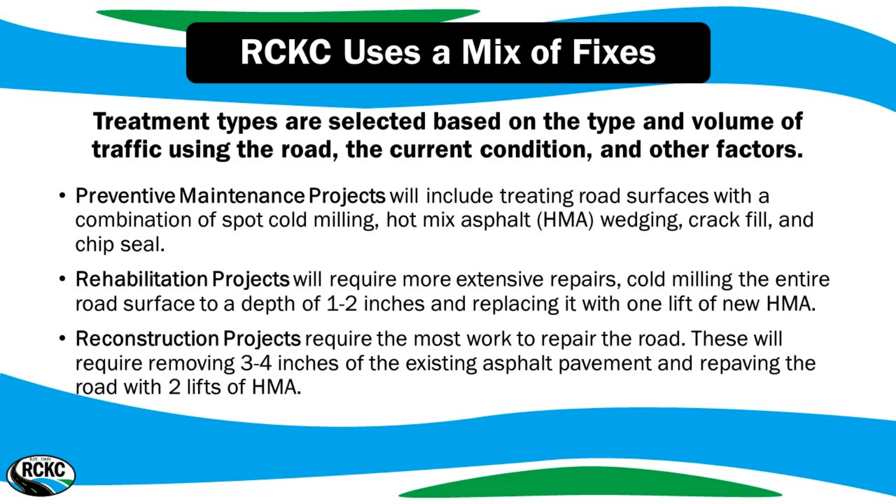So when the Road Commission does a project, we use a mix of fixes. We have many tools in our toolbox, and the way I look at this is like when you have a car, there's different levels of maintenance you do to it, right? So the three levels we have here are preventive maintenance, rehabilitation, and reconstruction. That preventive maintenance when it comes to car work is like doing an oil change in your car. It kind of keeps things running, keeps things going along. For us, that type of work is a chip seal, where it protects everything that's under there and protects our investment. Next, you get to the rehabilitation projects, where more extensive repairs are needed.

So kind of in the car analogy again here, say your transmission goes out and you want to evaluate, is the car worth getting the transmission fixed? For us, it means coming in and taking off a layer of asphalt and putting it back on to keep things going along for a few more years. And then finally, we reach a reconstruction project, kind of like we have out here for Lake Street. That's like you blew the engine in your car, or it's time to scrap it and move on to something new. So we're going to start over here with Lake Street and the work we have going on out here.

So you may be asking yourself, how was this project selected? The Road Commission did identify in our primary road capital improvement plan, which we do every year, this road as a project. Why? It was last paved in 1992. So 30 years is a pretty good run for a road. Probably reaching the end of its life here based on what we're seeing. The last chip seal we did was 10 years ago in 2013. So we have been doing the preventive maintenance in that 30 years.

Ultimately, there is a surface condition rating tool that's used uniformly across the state to evaluate the condition of roads. That's called PASER. If you want some more information on that, we can always talk about that later. But it's on a scale of 10, and essentially Lake Street was at a 4 out of 10 on that scale, with 10 being a brand new road. So we were reaching a point in the life of the road where it was coming to a point where we needed to do some major work.

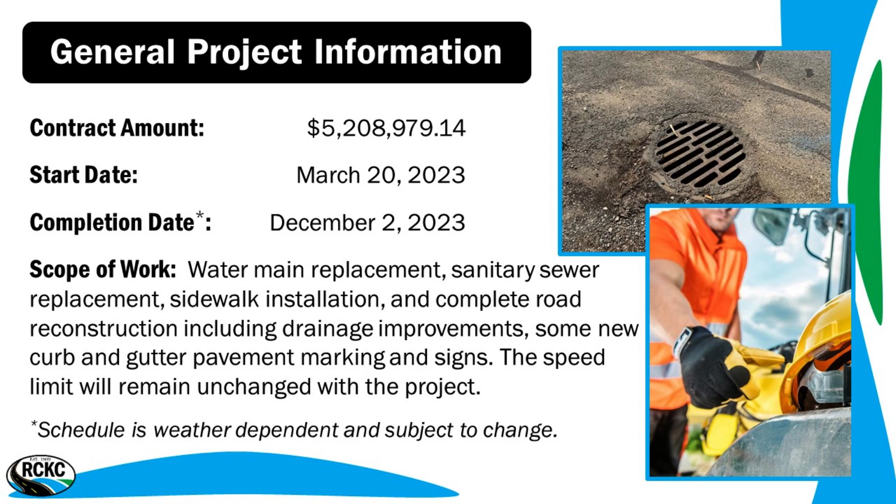The work includes water main replacement, sanitary sewer replacement, sidewalk installation, complete road reconstruction - curbs, gutter, pavement marking, signs, all of that stuff. We're not planning to change the speed limit on the road with this project.

I do want to mention that construction happens outdoors, so of course the schedule is weather dependent - things could shift around. Maybe if everything stays dry this summer, the contractor could get ahead on stuff, but we'll have to see. It's a long schedule, too early to say yet where we're going to finish.

So, impacts to traffic - this is usually what everybody's most interested in. There will be closures and detours in place for this project. The work is going to be done in 5 segments. We started the first segment already, so you've seen the work if you've been out there, going on the west side of the business loop. With these 5 segments, there are only 3 detour routes we need, so we're not going to be sending you on a different route every time we close a section of the road. We'll go over that in more detail here in a minute.

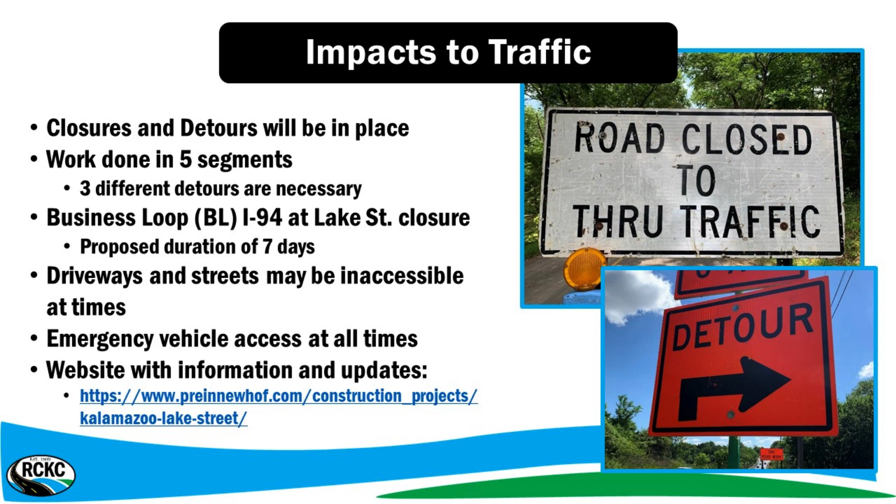There will be a closure of the business loop at Lake Street for 7 days during this project. We'll have more details on when that's planned, but it will be a full closure of the business loop for those 7 days.

With the work that's going on, your driveways and side streets may be inaccessible at times - contractors have to do work, and you may have to go around the block to get access one way or another. If we do work at driveways, we generally tend to put gravel ramps in if there are elevation changes so you can get in and out, trying to maintain access to your property.

Emergency vehicles will have access within the closures at all times, so there's no issues or concerns with emergency services being able to get in if you need their services.

I want to also mention Prein&Newhof again is the inspector for us. They have a website set up, preinnewhof.com, with a link for projects, and at the bottom of that page is one for Road Commission Lake Street. If you go to that page, they're updating daily what's going on, and the anticipated work for the next week.

Then the contractor is scheduled to switch to Phase B, moving to the other side of the business loop on Lake Street. This phase will close Lake Street from the business loop to Lamont Avenue, scheduled from May 30th to July 22nd. The detour for this route is the business loop to Olmstead. This is detour route number 2.

There's one more route we need to highlight to get you around the project. Depending on where they're working and what they're doing, access might be hindered a little bit temporarily while they're working in front of your properties or businesses, but we should be able to accommodate you getting in and out.

That third detour route is the most impactful. It happens when we come back to Phase A, Stage 2, which is the closure of the business loop at Lake Street. This is planned to be a 7-day closure, anticipated from July 24th through July 31st. The detour route is to take Olmstead to the business loop, back to River Street, to the King Highway, then to Branch, Vine, and Mills Streets to loop back around onto Lake Street.

After that, the contractor is going to move back onto Lake Street, further on down. Phase C is a Lake Street closure from Lamont to Roy, anticipated to occur from August 2nd to October 6th. This is a similar detour to Phase B, simply taking the business route down to Olmstead to get around the closure.

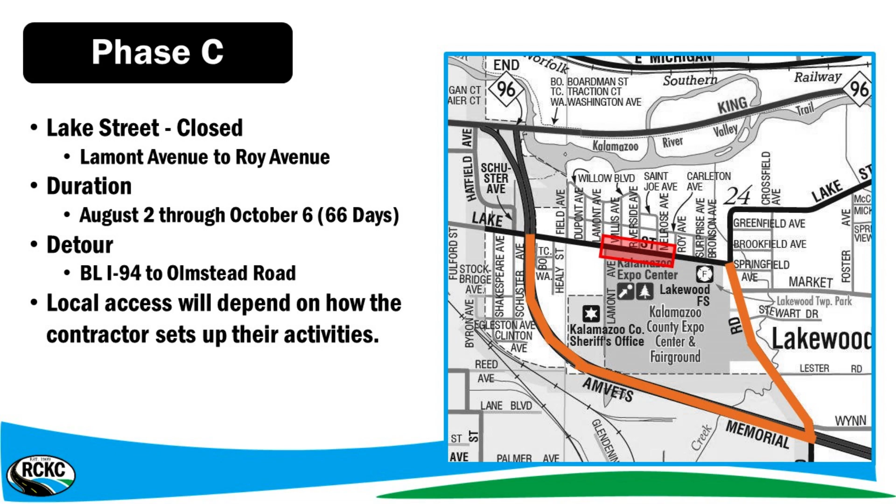Finally we have Phase D, which is closing Lake Street from Roy Avenue to Olmstead, anticipated to occur between October 9th and December 2nd.

We want to thank the Expo Center for hosting our meeting tonight. We know they have events going on, and we've been in communication with them and working with our partners to keep everybody operating with minimal impact. Access for the Expo Center shall be off Olmstead, and all traffic will be directed to that location. There is a driveway over there. We are not doing any work on Olmstead, so there will be access to the Expo site that way.

No work is going to be allowed during the NSRA weekend, which is September 9th and 10th. There's a little bit of buffer on either side so the contractor makes sure everything's closed up and out of the way so everybody can get in and out. The contractor is going to provide full access to the Expo Center entrances from both directions, the business loop and Olmstead, and also access to Lamont Street during that time.

We are aware of the magnitude of that event and the impacts it has here at the Expo Center, so we're going to do everything we can to get things buttoned up and out of the way so there's less impact. Other events may be directed to other access points depending on the phase of construction. However, the Expo Center will be open and events will be happening here during the construction project.

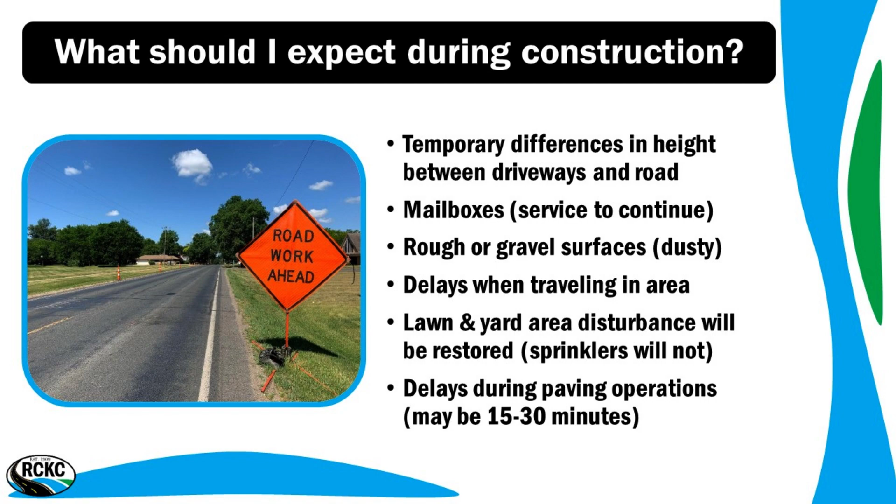There will be rough or gravel surfaces out here. The contractor can water, we can use dust control, but that doesn't last forever, and even if they do, there still is dust. So you need to understand that is going to create a dusty situation. We aren't going to be 100% able to eliminate dust on the project, but we will do our best.

We're telling everybody to expect delays when traveling in the area. There is a lot of traffic on the business loop. Not as much directly going down Lake Street traffic volume wise, but having to follow detours and sending everybody those routes can create delays and backups. So add some more time to your travel time if you have to travel in this area during the project.

Lawns and yard areas that are disturbed will be restored. I do want to mention, however, that does not include irrigation or sprinkling systems, so those will not be repaired with the project. If you have questions about that, we can talk about it after the presentation.

And then during paving, there may be delays anywhere ranging from 15 to 30 minutes potentially on getting in and out of a side street or a driveway or that sort of thing. I'll talk a little bit more about that when we get to another slide here in a minute.

So what should you expect during each phase? Essentially, each phase is being looked at as a mini construction project, but they're all tied together. The contractor is essentially going to almost complete each phase before they move on to the next one. What does that mean? Well, all the water main, sanitary, storm sewer, all that underground work is going to be done. We're going to have curb and gutter in place if it's called for on the plans. If sidewalks are called for, the sidewalks will be in place.

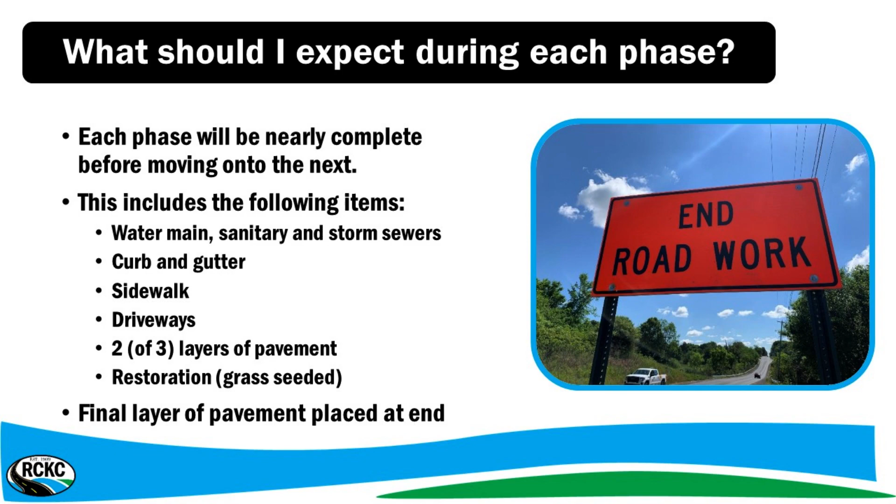Driveways will be restored to their hard surfaces. Then 2 of the 3 layers of pavement are going to be put back down. So while it will look like the road is done, there will be an elevation difference, especially if you have a curb. There will be 2 inches of a grade change between where this last layer of pavement during each phase will be done and the curb elevation.

And then finally, they will come in and do all the grass reseeding, putting down straw mat. The contract does not include watering and weeding, so if you would like the grass seed we put down to grow faster, we would encourage you to help out and water that.

And so I mentioned that we're doing 2 of the 3 layers each phase. That's because once all the phases are done, the contractor's going to come back and pave that last layer of asphalt all at once. So we have fewer joints in the asphalt, which prevents water from getting in, which will help the longevity of the road.

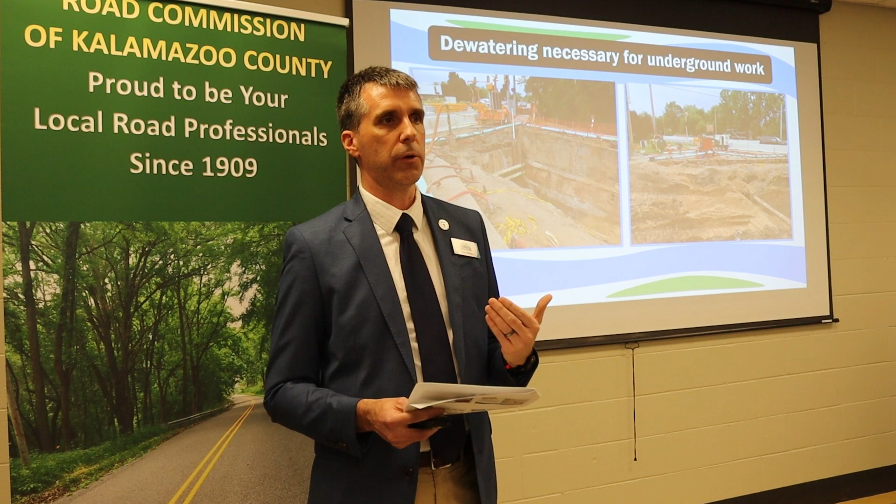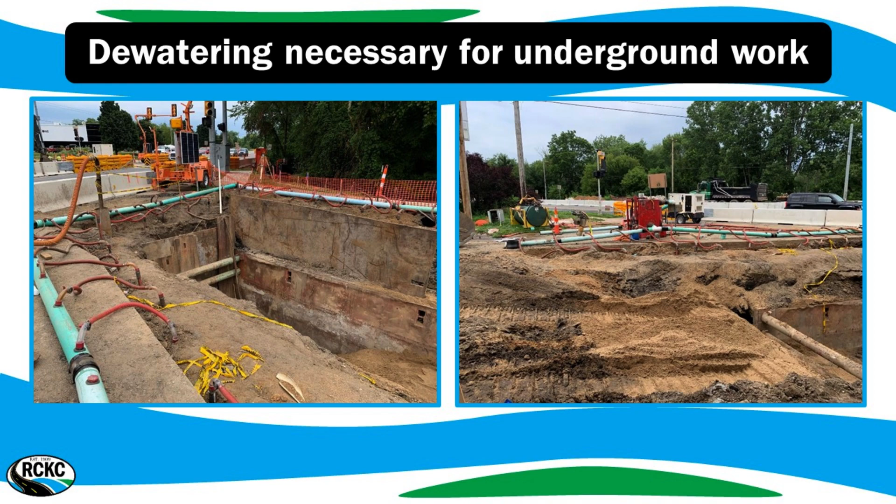So as we start to get into the project, the types of work you're going to see out here -- because of how close we are to the river, the water table is rather high. The contractor has to do what we call dewatering, or essentially drawing the water table down around where they're working so they can work in dry conditions. So they have a bunch of pipes and tubes and pumps running connected to draw the water down and dry everything out. Once they get the area dry and can work, then they can come in and start all that major underground work we have to do.

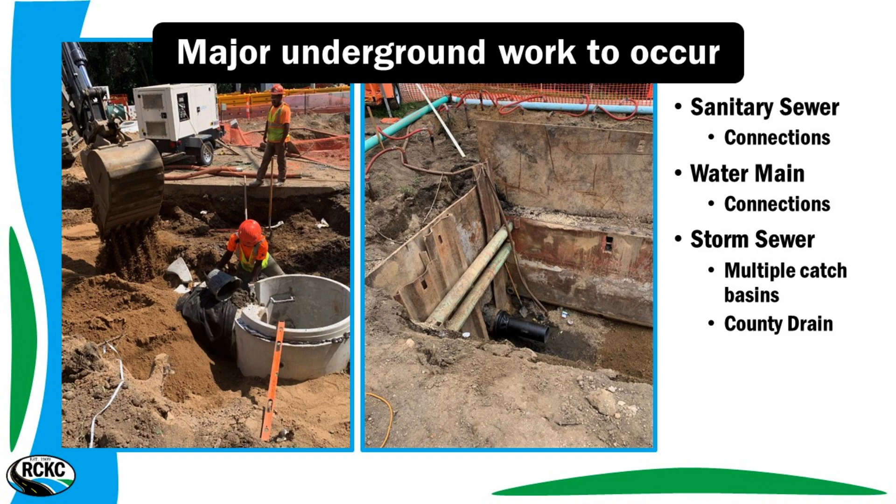So sanitary sewer is usually the deepest utility that we run into in our right-of-way, so that's where they're probably going to start, digging down to get all that in place. Next comes the water main, and those connections will be made in addition. Both sanitary and water will have to have connections made to the businesses as well. So those will have to happen during each of these phases so that when everything's switched over, everything is hooked up and running properly.

And then finally, for the underground work, we'll get to the storm sewer. We have multiple catch basins across roads, running up and down the road that we have to connect. So there's a lot of work with that. In addition, we are connecting into a county drain towards the east end of the project to manage some of our stormwater.

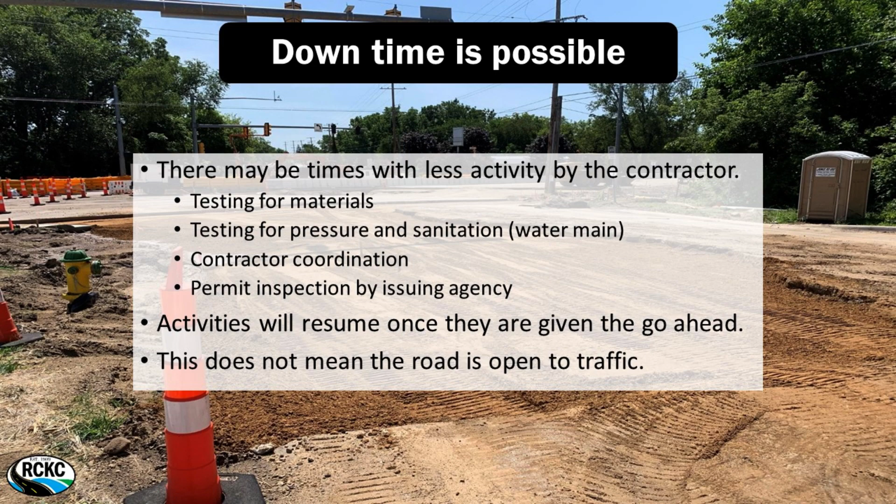I want to let everybody know there is some downtime is possible. You may look out there and it may look like the contractor's left and nobody's doing any work and nothing's going on, and it's a nice bright sunny day and you're going, what the heck is going on here? Why aren't they working today? There may be reasons for this. A lot of our materials require testing, and that testing takes time and takes time to get the results back, so there may be delays waiting to approve what the contractor is putting in. Additionally, with water main, there are certain tests they need to make sure the system can maintain the pressure they need it to operate at, as well as being sanitized and cleaned to the level they need before they open everybody's house back up to that water source.

While Milbocker is our primary contractor on this job, there are other contractors working for them, and there may take some coordination on trying to line up when contractors can come in and actually get their work done. And then finally, agencies that issue permits have the opportunity to come in and inspect whatever they're permitting before they let it all be buried and put back underground.

So I know EGLE, the State Environmental Office, permits water main, and so they may want to see something before it all gets buried, and we might have to wait a day or two for their inspector to come out and look at it if they so choose. What we want to assure everybody is that once they're given the go-ahead, the contractor will be back out there to work. They are committed to this job and to us for this construction season.

Also want to reiterate that even though work's not going on out there, this does not mean the road is open to traffic. You still should stay out of the construction zone because the conditions in there may not be set up for traffic to travel through.

So kind of want to get back to the road. Now that we've got all the underground stuff kind of out of the way, we're going to make sure we get back up to the elevation we need for the road. So we're going to bring in gravel, and that's going to be leveled and compacted so we can have a solid base to build on.

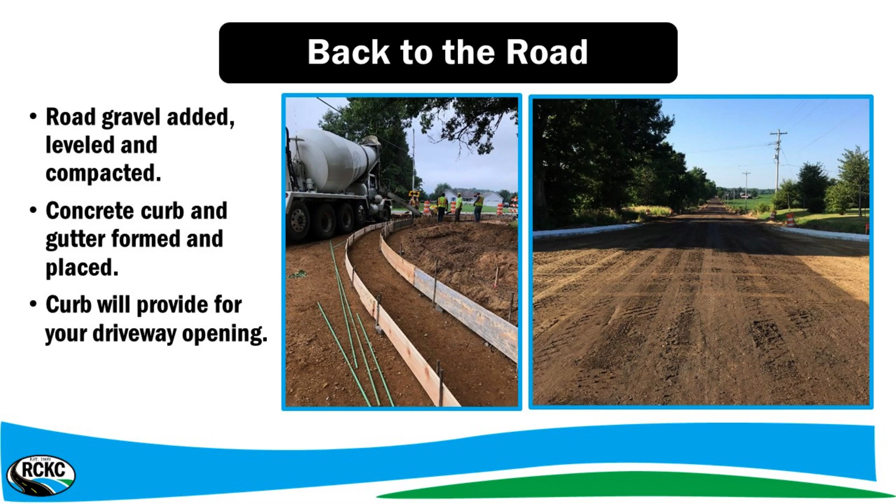Concrete curbs are going to be formed and placed where we need them on the project. And don't worry that if a curb is going across the front of your property, we are going to have those drop downs at the driveway so that you're not going to have to drive over a 6-inch curb to get back out onto the road.

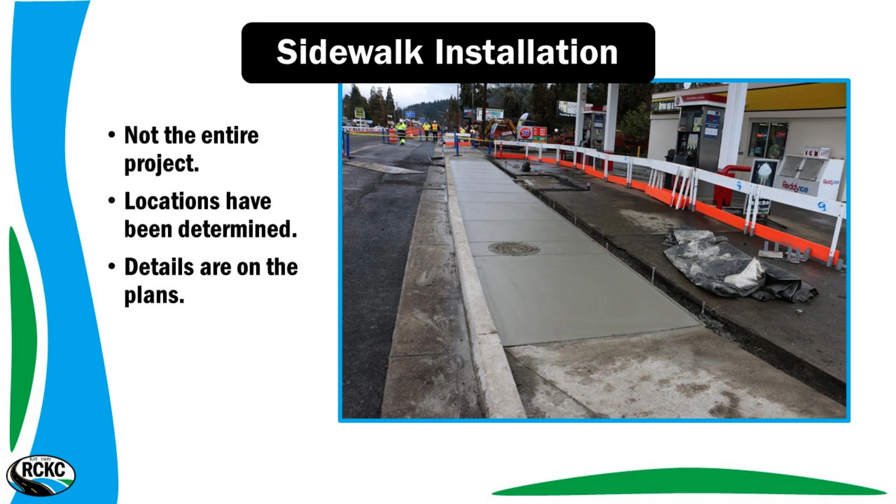Sidewalks will also be installed at this time where they're called for on the plans. The locations for those have been determined, so we know where we want to put those. It's not on the entire project. And details of this are on the plan sheets that we have.

So driveway access, as a part of safety measures whenever we do projects, we also look at driveway access. So whenever someone is entering a roadway, the person driving on that roadway in a vehicle has to try to figure out where they're coming from, where do I have to watch for people. So if we have driveways that are 60, 100 feet wide and people can just drive in and out wherever they want, it can pose a safety issue.

So there are some locations on this job where we're looking to narrow up some of those driveways back to more standard widths so that it's just not, I'll say, kind of a free-for-all when coming out of properties. And motorists on the road as well as exiting the properties have a better idea of where those interactions can occur. So you can see here on the pictures on this slide, we have a before, during, and after instance

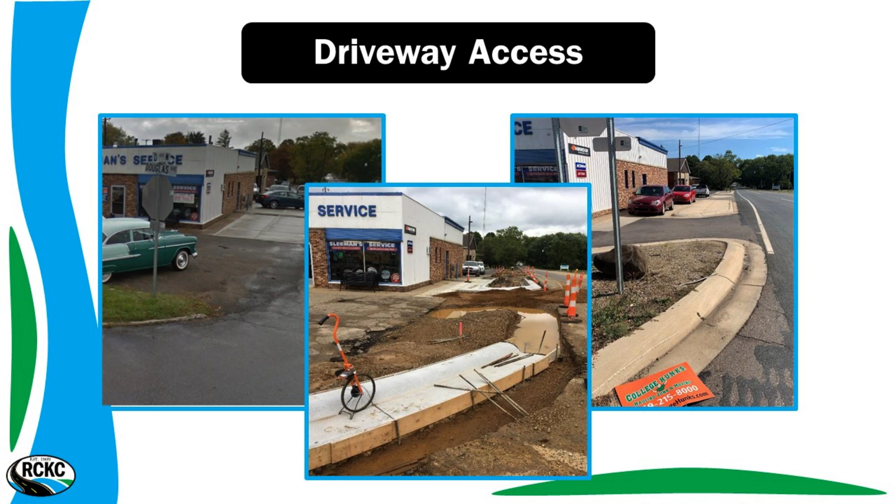of where we narrowed up a driveway a little bit that was right near an intersection, letting people know that, hey, you can kind of come in this driveway, but you shouldn't come out because you're within 10 feet of a stop sign in the intersection. It's kind of a safety concern for us.

So driveway approaches, we mentioned with curb and gutter. The curb sits up 6 inches higher, so we have to make sure that we can address grade issues from where the road elevation is to where we got to tie back in to make sure that you can get in and out of your buildings.

So I know we've approached many of the property owners already about temporary grading easements so that we could have that permission to work outside the right-of-way to get those driveways and approaches back to a grade where they wouldn't have this situation.

We'll finally get to asphalt paving. And again, this is going to be done, there's going to be 3 layers of asphalt put down, and they do half a road at a time, so they're going to come down six different times to do the paving here.

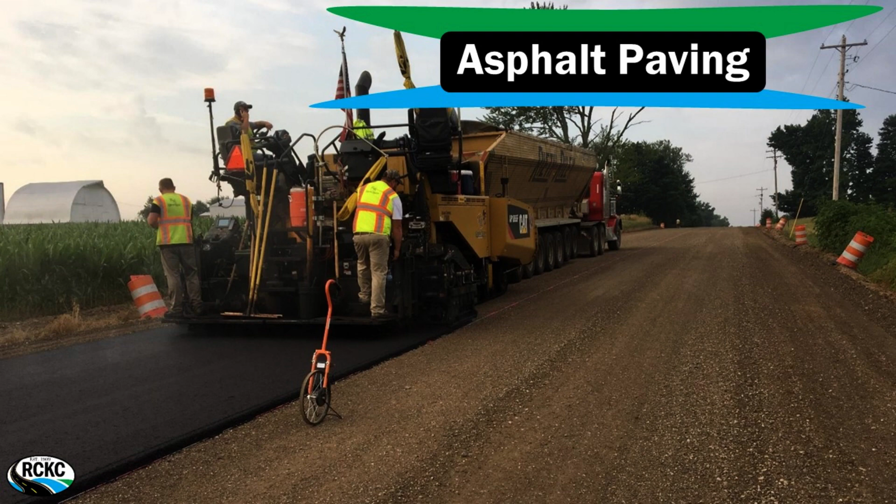So when the pavers are going by, I understand, like right now that it's a little light on the screen here, but that may look like, hey, that's nice new asphalt, they went by, I can just drive past them, right? That's very hot, it hasn't been compacted. If you were to drive on that, number one, at this point you would sink in.

If you were to turn, you would just start tearing that all up. So when the contractor or inspector tells you that you can't drive on the asphalt, it's to protect this investment we're putting in the road. We need you to be patient. As they're crossing driveways and side streets, we may have to hold up access and not allow you in and out until it's cool enough to drive across.

At that time, they're probably going to direct you to drive straight across and turn off. Don't pull out here and then turn your wheels, because you're going to start digging everything up and create a big issue, which is likely to create potholes for us in the future—that's what we're trying to avoid.

Once the paving's done, the contractor will come in and do restoration. Any grass areas that are disturbed will get seeded, topsoiled, and we'll put a straw mulch blanket on top to help hold the moisture and seed down. If watering and weeding is not part of the project, if you as property owners would like to assist with that rather than rely on Mother Nature, that would be greatly appreciated.

We will also be updating all the signs through the corridor, so we want to make sure when we do these projects everything is up to date, meeting current standards for spacing, types of signs, and so on—all the signs will be updated.

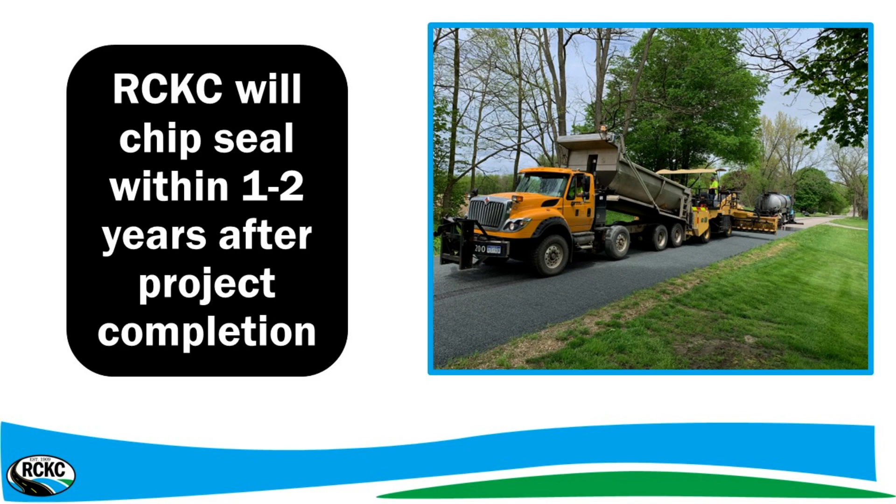But I also want to let you know we're going to be back in a year or two to chip seal this road. You might be questioning, why a brand new road, are you going to chip seal it? Going back to my car analogy from earlier: if you've got a new car, when are you going to undercoat it? Are you going to do it when you just buy it, or wait six years?

For us, water and the sun are the two major enemies of our asphalt. So if we can get this layer of asphalt and stone on it earlier, it helps protect that investment, and we've seen this extend the life of pavements we've been doing this on for about six or seven years now.